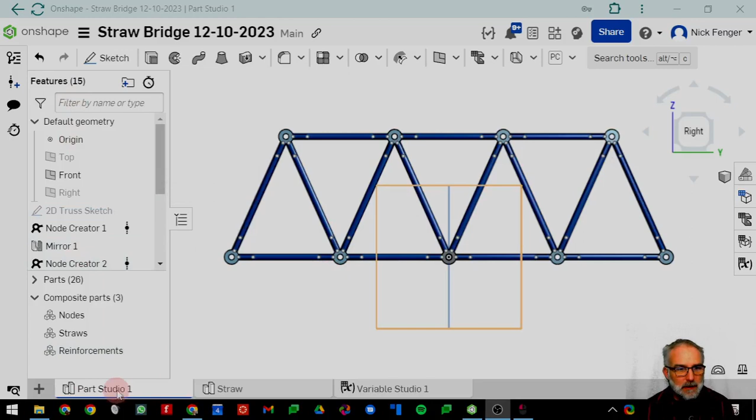Okay, now we need to create an assembly that has our bridge side. Right now, this Part Studio here is our bridge side Part Studio. We can rename it to that.

But it's not really an assembly we can bring directly in. We don't have a single part here to bring into an assembly, and we'd rather not bring all the parts in as separate pieces. We're going to need 2 of these, so let's make an assembly. Easiest way to do that is click on Create Assembly.

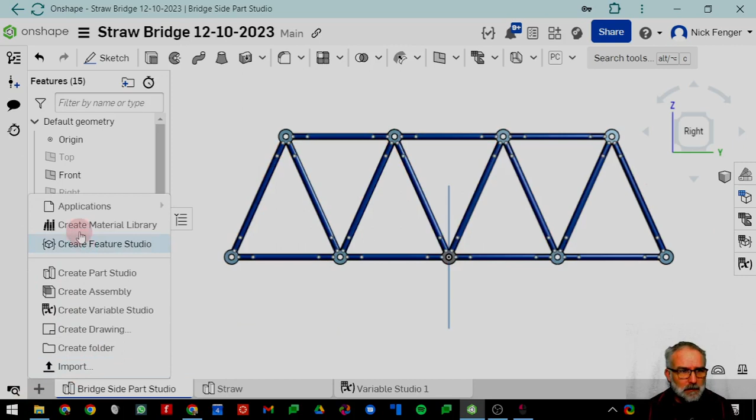We're going to rename this assembly to the bridge side. And we're going to bring in our parts.

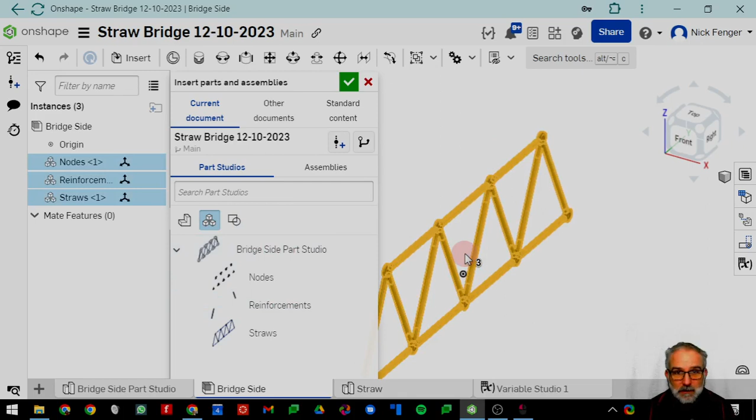Inserting those is really easy because of the composite parts. Notice we've got parts selected, sketches - we don't need either one of those, we just need composite parts. So uncheck parts, make sure composite parts is the only thing selected, and just click on the first item, the whole bridge side. It was 3 composite parts, and we're going to turn it to 1 assembly.

We'll just click here, check the green box. We can go over here and click the right. It looks the same, but it's really not assembled yet. Notice it can fall apart pretty easily. So Control Z is your friend here.

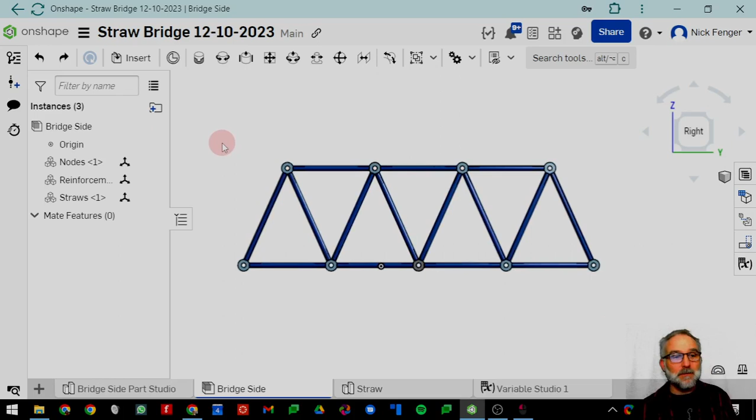Easiest way to put this all together - we don't need to use mate connectors, we can actually use a pretty fast tool. Anytime parts are aligned properly in a Part Studio and you just want to make them into one part, we just use the group tool.

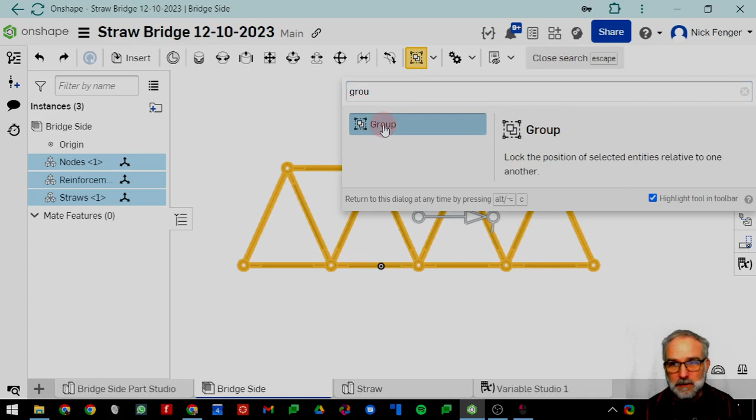Like any other drawing tool, group will lock positions relative to each other. So we had them selected - if you didn't, just select all 3. Click there. And that's our bridge side. That's it, we just put them all together.

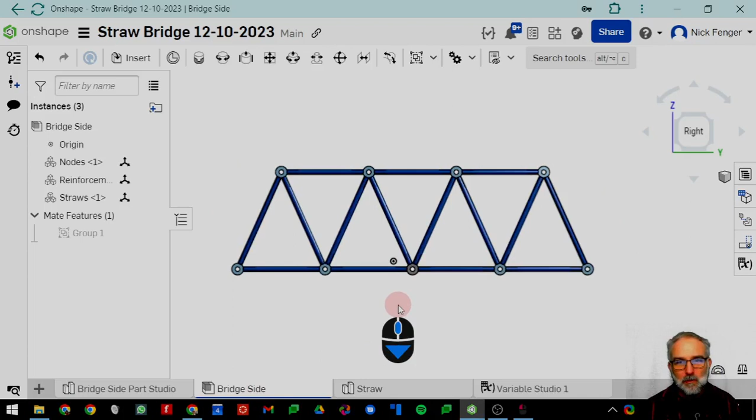Alright, we're ready to assemble this whole bridge. We've got our side drawn, a side assembly created. We do need one more piece before we can put the bridge together, and that is what's called the strut. The strut puts the sides together, so it's going to go through these holes. We drew all our other straws using the frame tool, but we just need one strut to go through that.

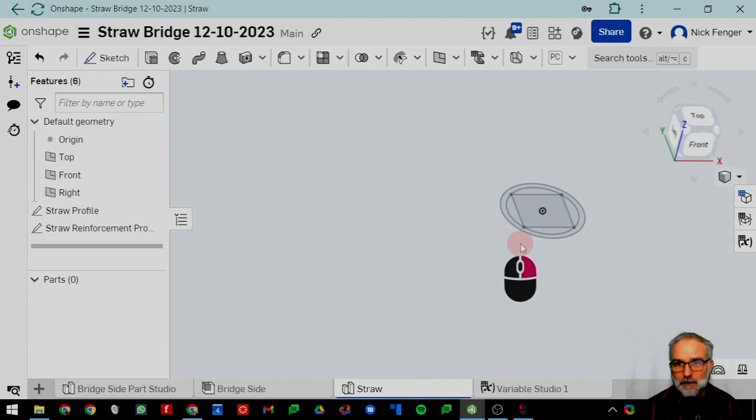So let's go over to the straw. We can just create it right on here. So let's do it, create an extrude. We have to decide how wide we want our bridge, but we have a variable for that. Bridge width - I think the maximum is 8 centimeters or 80 millimeters, so we'll use that here.

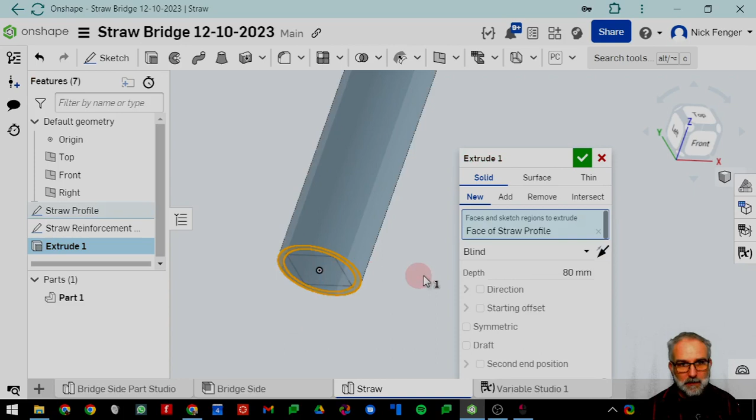And we just need to pick our straw profile, just like we did for the struts between the nodes on the side, and that's it. We've got our strut. We'll actually rename that strut so it's easy to find. Strut.

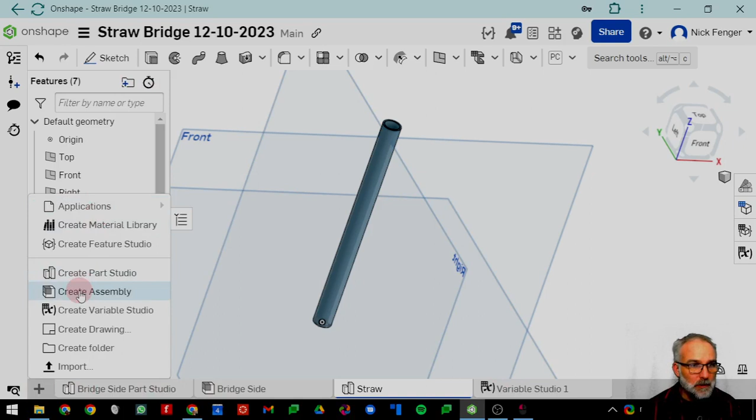T-strut. Okay, now we want to create our assembly for the full bridge. So create assembly, we'll call this one full bridge. Rename it - get in the habit of renaming right away, then you can find things easier. All right, so let's insert.

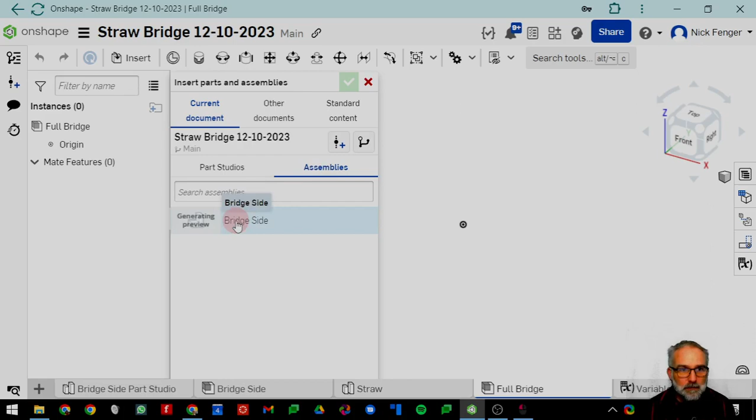We'll need 2 sides. Let's see, we want assemblies over here, and here's a side - okay, one of those, bring one more in. And we need Part Studio, we need a strut. And that's all we need. We will replicate that strut, and that will be done with another tool.

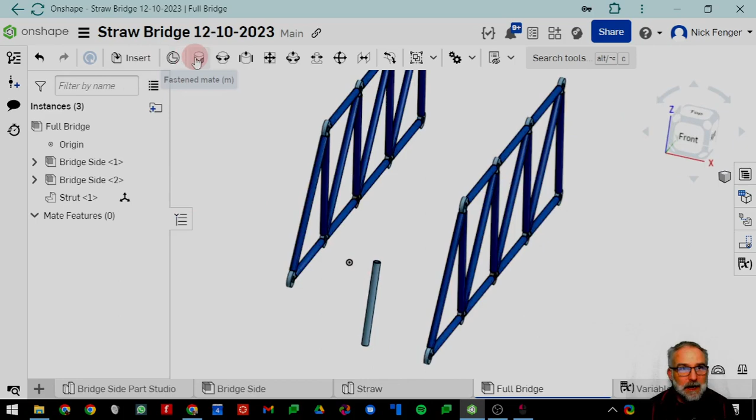Okay, so let's mate things together. Back to fasten mates - so we want to bring this strut into the bridge side. Can just click right there. This is your axis on the mate, and I believe it does not matter in this case, but we're going to show you a trick here.

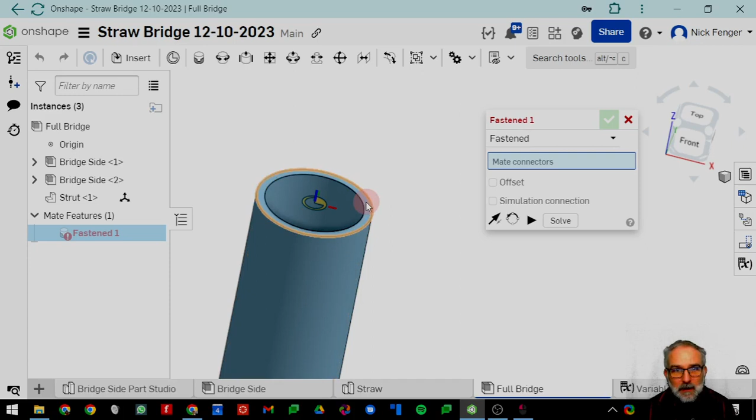If you are having trouble getting the center, you can hover here, hold down the Shift key, and notice it will force you to pick it. So Shift - this is showing us that little arrow up, so if I'm holding down Shift. I recommend using the Shift key when you're selecting anything floating like that. It works really well.

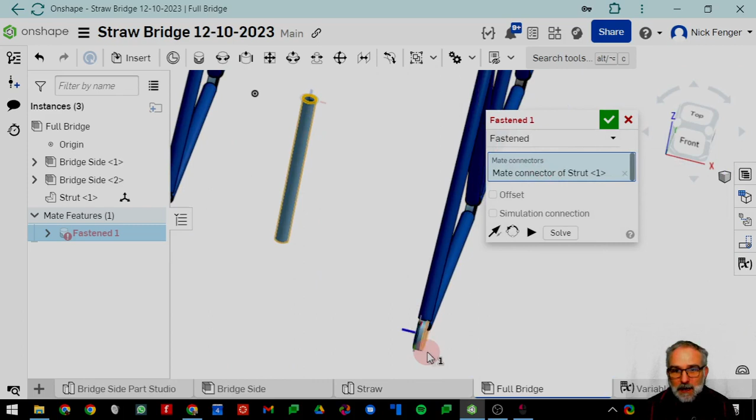So that needs to connect into the strut, the node here. So let's go down here, again hold down the Shift key. Notice the Shift key being held down allows you to move wherever you want, but we want to be in the middle.

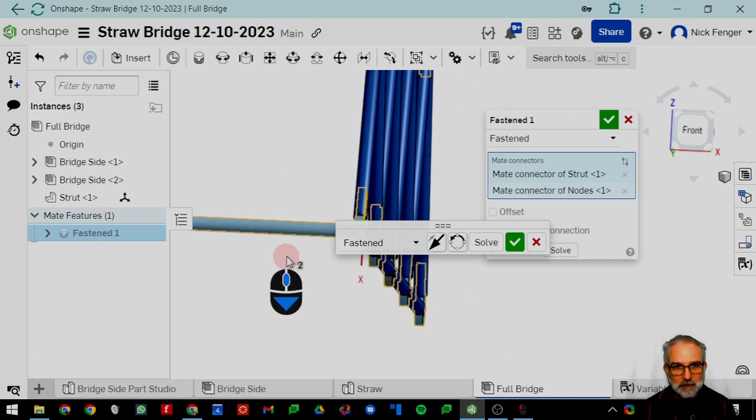Okay, and notice what it did. What's nice about holding the shift key down is it aligns your Z axis on both of them, so it was pointing to the right, and it ensures that the strut is pointing, it's connecting on the right side. So looks pretty good, so we'll click here to get another fasten mate, and let's put the other side of the bridge on there.

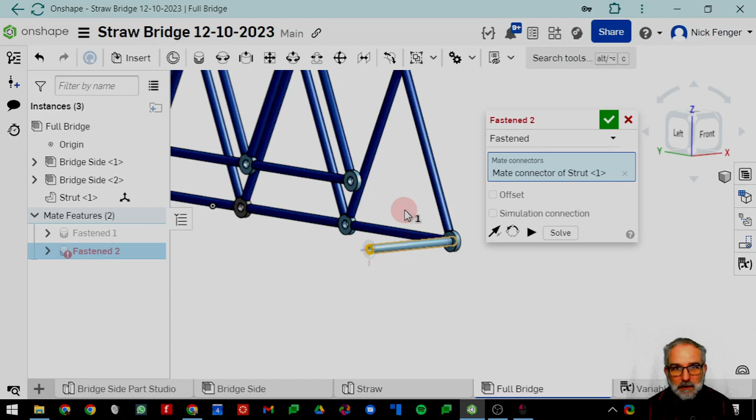Again, we're going to go over to this side, and we're going to hover over it, and we'll use the shift key. There we go, and we're going to go to this side here, hold the shift down, and we've got the same thing. If we hit solve, it brings them together.

And there we go, this is our last fasten mate. So remember this check mark, commit and start a new mate. We're done with fastens for now, so we're going to close it up here.

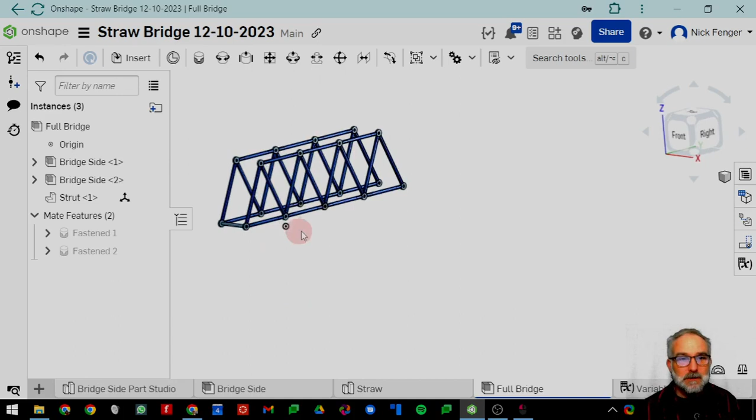We're getting it together. Now, we've got a lot of struts to draw. There's a tool that helps us do that, it's called Replicate. If you search for Replicate, there it is.

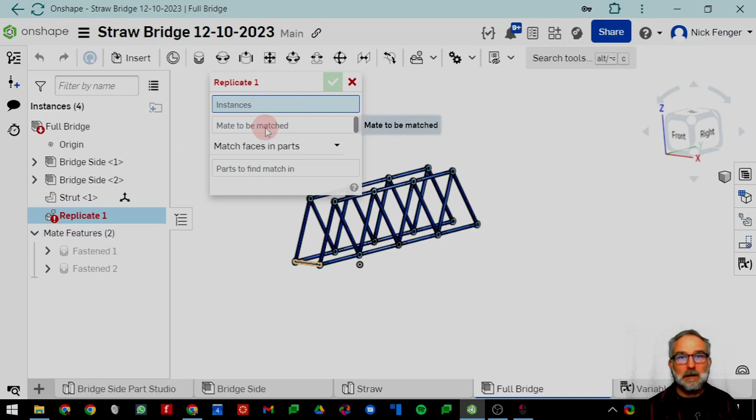You can see it hiding - it shows you where it's hiding, it's hiding under this menu. We can pick it here or pick it there. Replicate - oops, did not pick Replicate. There we go. So replicates an instance. An instance is one part. So we want to pick.

It can actually replicate other things too, like mate connectors. I'm gonna pick that one. Mate to be matched - it's finding one of our mates. It only has to match one of them, it'll put the bridge together. Find faces to match in.

So there's a couple options here: plane, face, and edges. Plane would be the ideal, if it works - sometimes it does, sometimes it doesn't. It'll get them all. So let's try this.

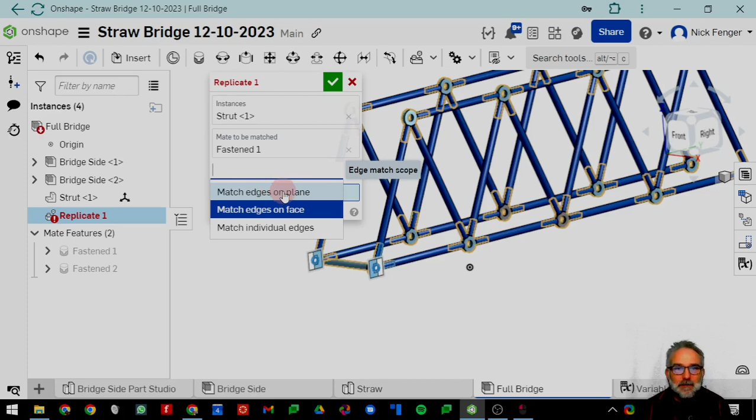Fasten 1 is the mate - let's just see where fasten 1 was. It was the first mate we did, so it was this one. So we want to pick the plane over here. So let's try it, planes to match.

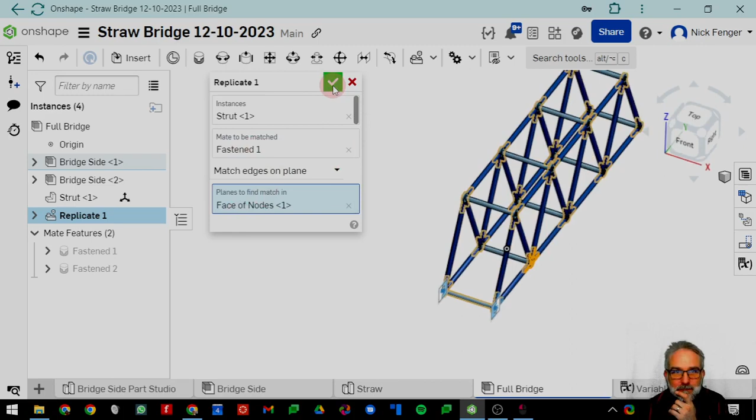Here we go, and voila. If we made sure we picked the same plane as that mate, it will do it. And just to show you, that is where fasten 1 was - you can see it get highlighted. Right here. So we picked the plane that was on that side, and it put all our struts on.

That is your full straw bridge without cross bracing. We'll get into cross bracing in another video.